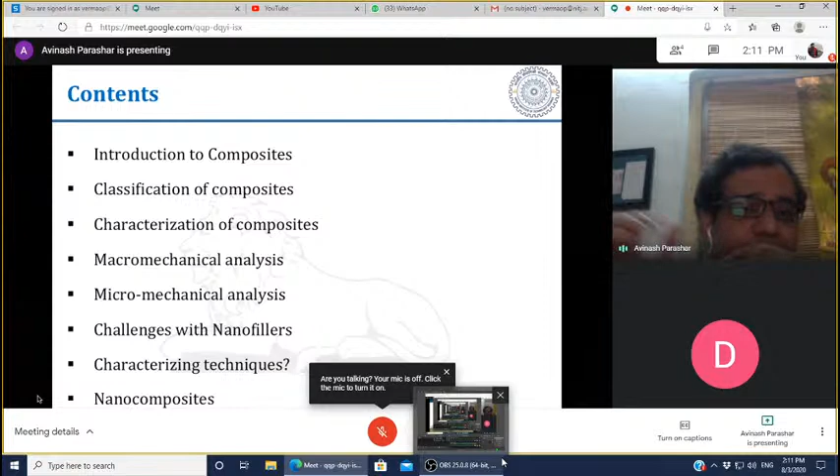So I am moving to the next slide, which discusses the contents that I am planning to discuss during this short lecture. Introduction to composites, how we can classify composites - composite can be classified in many ways. Characterization of composite - one of the main challenges we are facing with composite is how to evaluate and characterize these composite properties. Macro mechanical analysis, micro analysis.

We all discuss these words macro and micro in our day-to-day dealings when we are dealing with engineering. Like micromanagement is a very common word we use in our day-to-day life - this manager is very micro, he goes to the very micro level. It means I am talking about finer details. Macro, I am talking about broader aspects.

Then challenges with the nanofillers, nanocomposites. When we talk about nanocomposites, the word starts with nanofillers, nano reinforcement. The only difference between composites and nanocomposite is the size of the reinforcement. In one case it is conventional, in microns, whereas in nano... because this time the presentation is only one way, the communication is only one way.

So I am really sorry, because this is my first lecture on this kind of platform. Otherwise, normally I keep on interacting with the students. What is the meaning of nano? It means I am talking about at least one dimension that is in the nano regime, in nanometers. And finally, I come to nanocomposite.

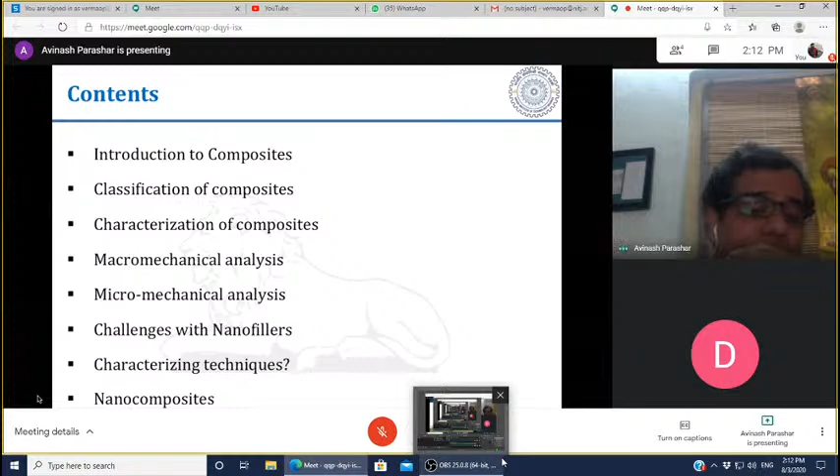We discuss how we can study nanocomposites. Most of the things that I covered in nanocomposites or nanofillers are from my own research. History of composites - we are using composites in our day-to-day life. Even if I am talking about brick made of clay reinforced with straw, again I am talking about composites. How are composites different than alloys?

The first thing that comes into why I am dealing with composites, why I am talking about composite, why not alloys. We all know what alloys are: iron alloys, ferrous alloys. Those who are in BTech or higher levels, the iron-carbon diagram is the first thing we learn in the course of material science.

If we memorize that diagram, the whole course is over. So it means I am talking about alloys, in which chemical reactions take place. Iron and carbon mix with each other and form chemical bonds. Chemical reactions take place, and the phases of iron and carbon are not separable.

We call them alloys. There are different alloys: brass, bronze, duralumin. These are some of the common alloys we talk about in day-to-day life. In all these cases, like brass, there are two metals, but they are not physically separable. Similarly, bronze is also an alloy where the phases are not separable. But when I talk about composites, again it is a mixture of two things.

One is reinforcement, the second is the matrix. Matrix is the material that covers the reinforcement. In RCC, the iron steel rods we use are the reinforcement that helps improve bending stiffness. Wood is again a composite, where cellulose is the reinforcement and lignin is the matrix.

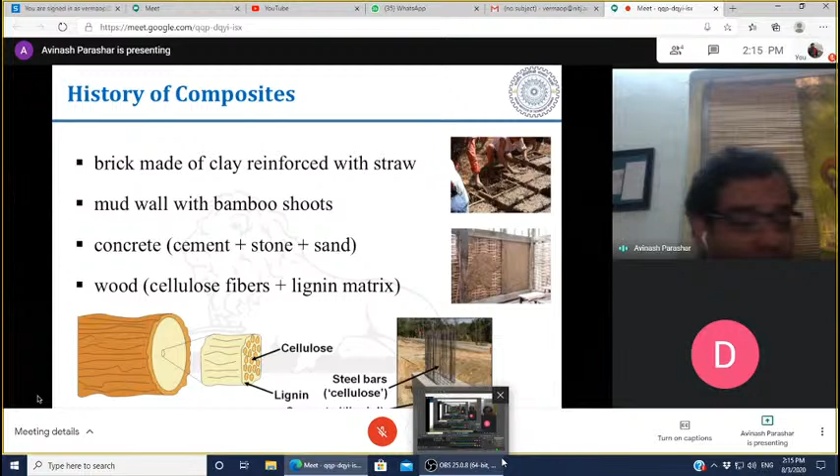Next is advanced composite materials. When the term composites was introduced in the early 90s, and still today, most applications of composite materials are in aerospace and space research, even at cryogenic temperatures going down to minus 200 degrees Celsius in space, or in regions like the North Pole or Antarctic where temperature goes down to minus 50, minus 60 degrees Celsius or even lower. So we are still looking for composite materials. Earlier, in 1990 when composites were introduced, they were referred to as advanced composite materials and used in the aerospace industry.

Some examples of composites are carbon fiber epoxy, where carbon fiber is the reinforcement and epoxy is a thermosetting polymer. Epoxy adhesives—we've used them since childhood. So epoxy here is the matrix. Glass fiber epoxy is another kind of composite where the reinforcement is changed. Alumina particles and aluminium is another class of composite, where both the matrix and reinforcement are changed.

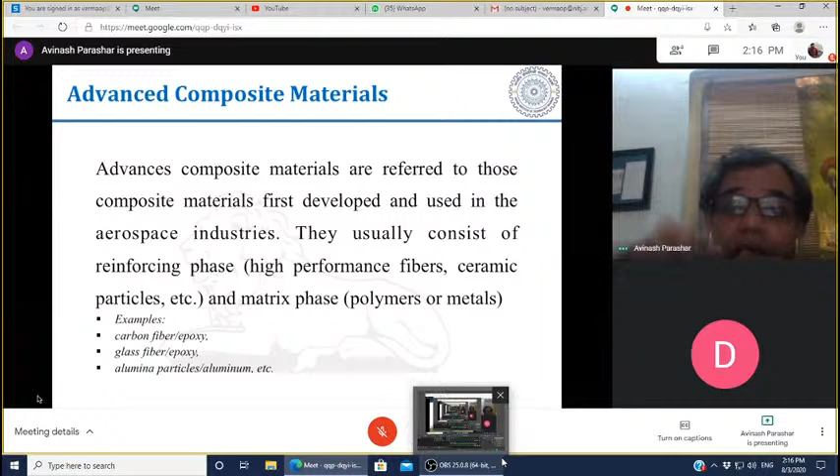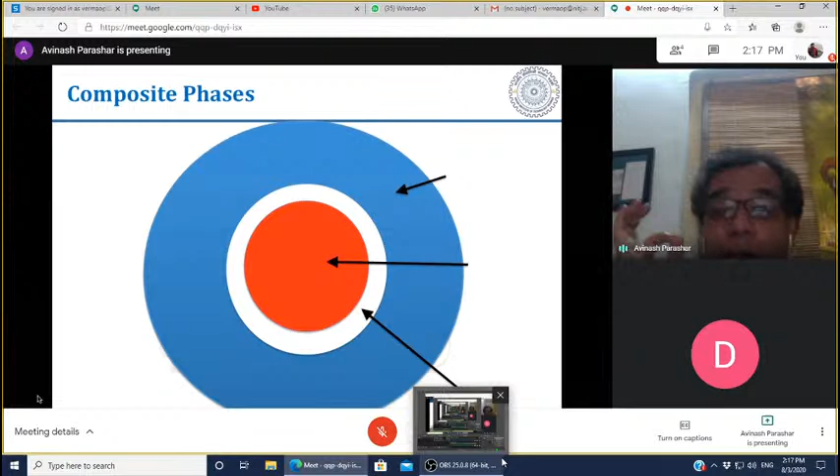Now moving to the next slide. Here in this figure you can see three colors, three circles. The outer big blue circle, then a smaller one—this is like the front face of a big pipe, I'm considering it like this. So there are three materials I am going to talk about. The red one is the most important; it basically governs the property of a composite. So what are these three phases?

First, the matrix—the material that needs to be reinforced because the matrix has weak properties, and I want to reinforce it for higher strength. So I call it matrix. Then I reinforce it using fiber, shown in red. It can be a glass fiber, a carbon fiber, or if the dimensions are in nanometers, I can call it a nanofiber. Then there is a third thing, the white region—this is going to be the interface between matrix and fiber.

Whenever we apply any load on this phase, I apply load to the matrix. Using this interface, all the load is transferred to the fiber, which has superior mechanical, thermal, or whatever properties we are talking about. So it basically governs the overall properties of the composite. Overall, this is referred to as a composite material or composite pipe. So I divide the composite into three phases: matrix, fiber, and interface. This is basically the overall view of a composite material.

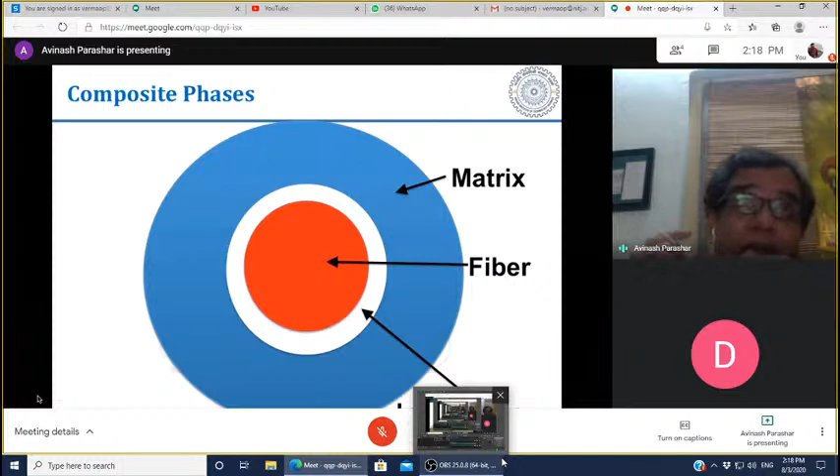So the interface plays a very important role. Even when I am dealing with nanocomposites, working in the field of nanocomposites, I still feel the interface plays a very significant role.

If I know the properties of the fiber, fiber has a very superior strength. Just think, you have a steel rod, and you put some plastic surrounding it. Now you apply some load - where will all the load go? You cannot stretch it, because that steel rod governs the mechanical properties of that overall object. The steel rod is surrounded by plastic, but it is not the plastic that governs the deformation, it is the steel rod. Even in your pen or pencil, if you start stretching it, it's not the outer wood but the inside graphite that governs the overall mechanical properties. So in that case, fiber is the one governing the properties.

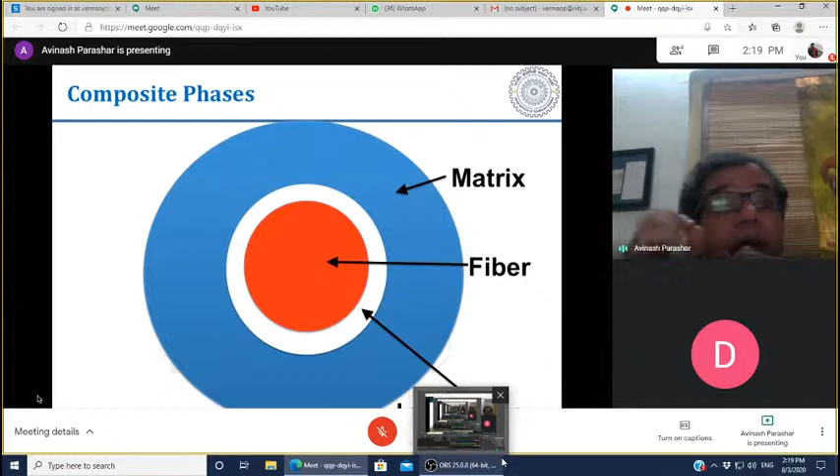Now, composite can be of different types. I can classify composite based on matrix. There are three phases in composite: matrix, fiber, and interface. I can classify composite based on all three. A composite can be a polymer matrix, where the matrix is a polymer. Metal matrix, like aluminium based alloys or copper based alloys - metals used as matrix with different types of reinforcement. Then the third is ceramics matrix, like alumina we are using. So we can classify composite based on these three categories: polymer, metal, ceramics.

Further, polymer matrix can also be classified as thermoset polymers, thermoplastic polymers, and rubber. Thermoset and thermoplastic I don't need to explain further, since we all know what they are. Thermoplastics can regain their strength and be remolded by raising the temperature above the glass transition temperature, melting it, and remolding. Whereas thermosets, it's not possible - it has a degradation temperature, and it starts degrading if we increase the temperature.

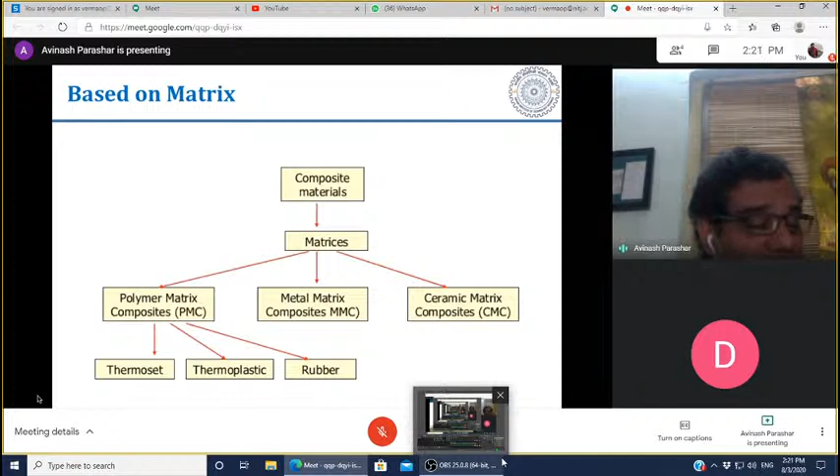Another way to classify composites is by reinforcement. I can classify composite based on two things: the type of reinforcement I'm using, and the geometry of the reinforcement used for manufacturing or synthesizing the composite. Continuous fiber - unidirectional lamina composite fiber - means fibers are of long length, going from one end to the other end of the composite. If talking about composite plates, the length of the fiber is from one edge to another edge. I call this continuous fiber.

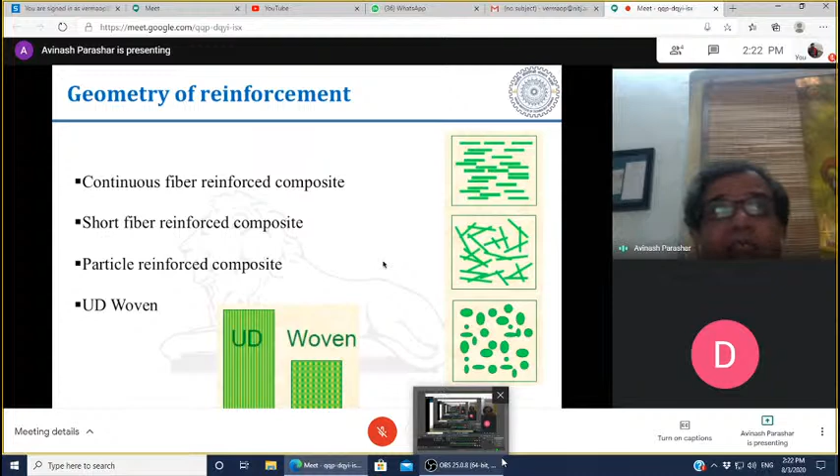Whenever we deal with composites, we normally talk in terms of specific properties - mechanical strength divided by the density of the material. When I divide by density, higher the density, lower the specific strength; lower the density, higher the specific strength. Metals normally have low specific strength because they have very high density. Polymer based composites are very light in weight, really very light in weight.

They are used in aerospace industries because every inch, every gram of weight needs to be paid for. I need a bigger engine to lift a higher weight, so I want to reduce the weight as much as possible.

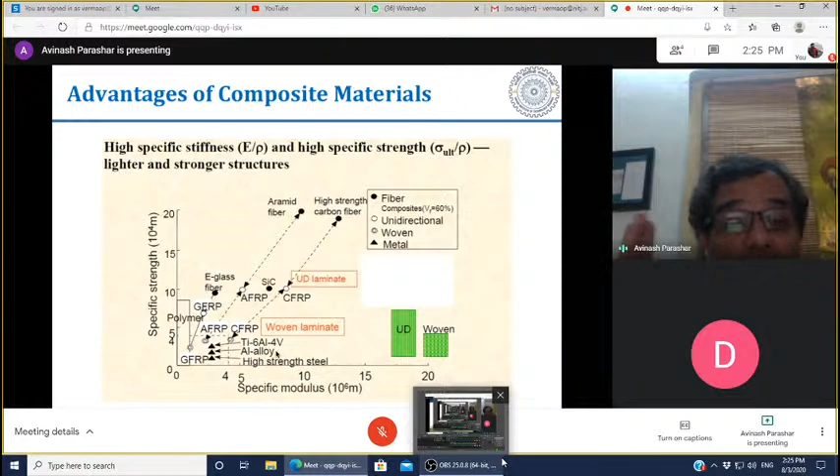So these types of composites also have different types of strength, and the strength of a composite depends on the orientation of the fiber as well. We will discuss what are going to be the advantages of the composites.

When I'm talking about polymer, it means what is the biggest problem that we have with the metals? When we have metal pipes, what is the biggest problem that we have with these materials? Metals are very heavy, metals are corrosive in nature. These days, metal pipes have very high wear, they are corrosive in nature, plus heavy in weight.

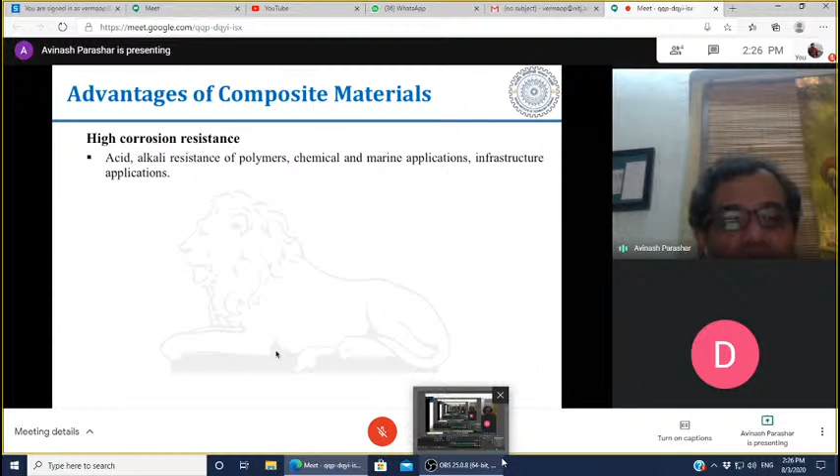Whereas if I replace these pipes - normally in Canada, if you go to the northern part of Canada, they are replacing these metallic pipes with composite pipes, and the reason is high corrosion resistance. So the maintenance cost is drastically reduced. I do not need to replace these pipes because of wear and corrosion regularly. I can take the advantage.

High impact resistance - where does this impact resistance come from? When I am talking about space structures, I need it because debris comes and damages the parts. So high impact resistance despite having a low weight. We are using this composite in automobiles as well, where weight is low.

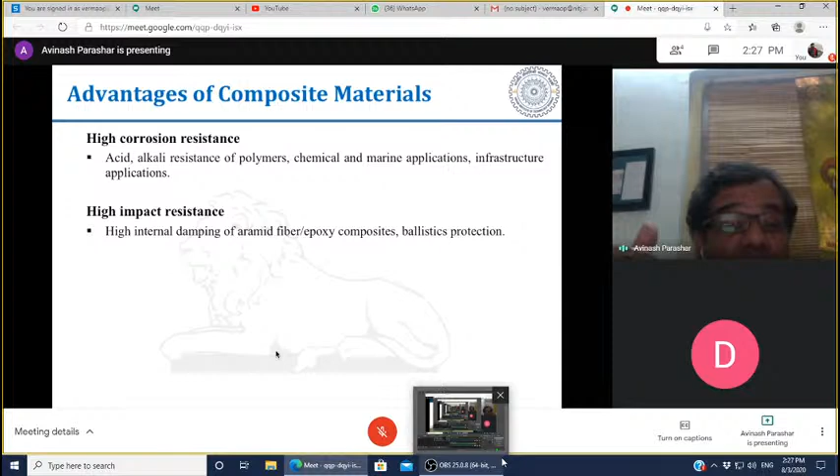Now these days, whenever we are going to purchase a car, what is the main question that we ask at the dealer end? If we are purchasing a Honda City car, what is the first question we are asking? As an Indian, I can say I just ask two questions. My first question is, what is the average, because we are more interested in mileage. Second thing is the capacity of the engine - how many cc is this engine? Now if you see, Honda cars are very light in weight, and these big cars are very light in weight and very high power, and the reason is because they are using composites as a material for manufacturing most of the components.

So high impact resistance, then we have high wear resistance - again, I talked about ceramic based reinforcements. High wear resistance, resistance to extreme mechanical environment conditions. When we are talking about extreme temperatures, suppose I want to make some space structure - what do you think the temperature is going to be over there in the daytime?

If the temperature is around 150 degrees Celsius in the daytime, what is the temperature at night? Minus 150 degrees Celsius, an overall range of 300 degrees Celsius. Every material has a thermal expansion coefficient. So what do you think, can the dimensions and tolerances for a component designed to work across such a temperature range, from minus 150 to plus 150, remain stable? No, it cannot work. The dimensions will definitely change because the material will contract at night and expand in the daytime. So I need a composite material that takes care of this, because there is no metal I know that can handle this.

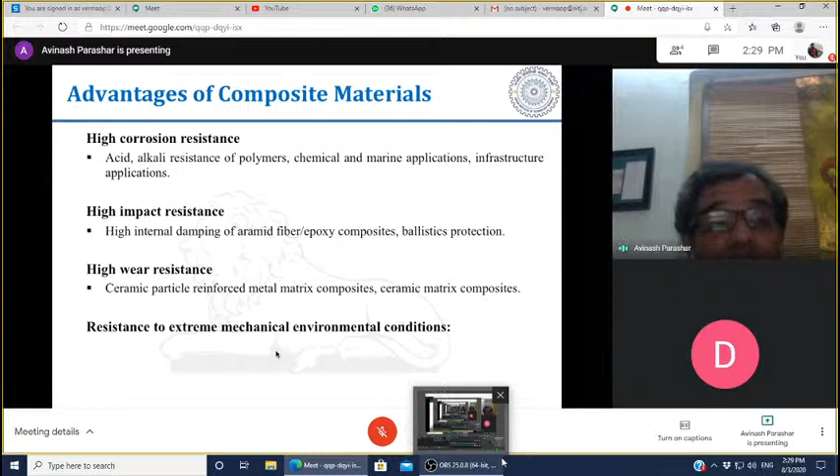So again, composite comes as a survivor. Carbon reinforced carbon matrix resists a temperature of 3300 degrees Celsius for a space shuttle. In the space shuttle we use carbon matrix, carbon fiber - everything is made up of carbon, because it can resist a temperature of 3300 degrees Celsius.

Carbon epoxy composite - read this line very carefully. Carbon epoxy composite has near zero thermal expansion. It means the overall alpha of the composite is going to be zero. So temperature has no effect on it, because epoxy has a positive thermal expansion coefficient, whereas carbon has a negative one. So when I mix these two materials and make a composite, the overall thermal expansion coefficient becomes negligible. So when I subject these structures to a range of temperatures, the material will not expand and contract.

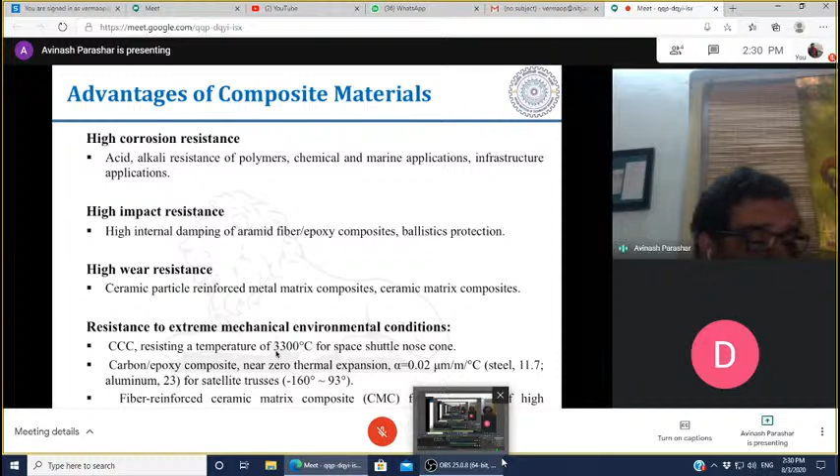This is one of the advantages we have with composites - tailorable properties. One of the major advantages of composites is the word tailorable. What is the meaning of tailorable? Tailorable means I can play with the properties of the material.

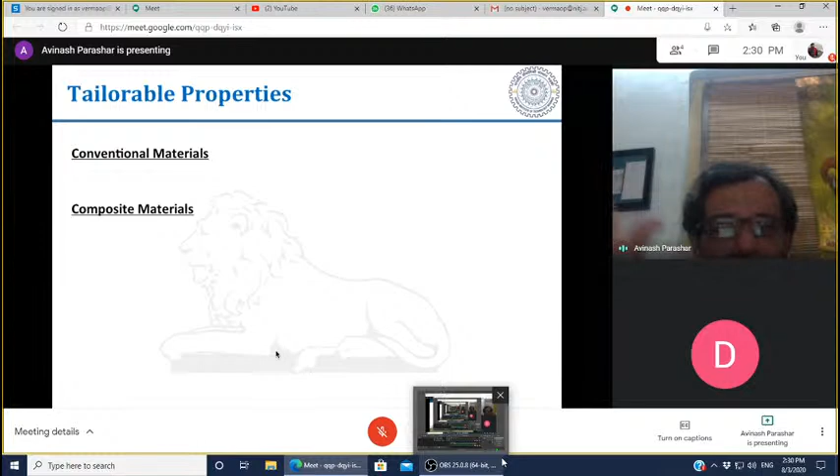What about conventional materials - can I not do this? Yes, I cannot. With conventional materials, most of you are working on Abaqus, ANSYS - what exactly are you doing? You have a geometry, you apply some load, and then you calculate the stresses - beautiful blue, green color stress distribution - and you identify, oh this color is red. The different colors give me an idea that my results are perfectly fine.

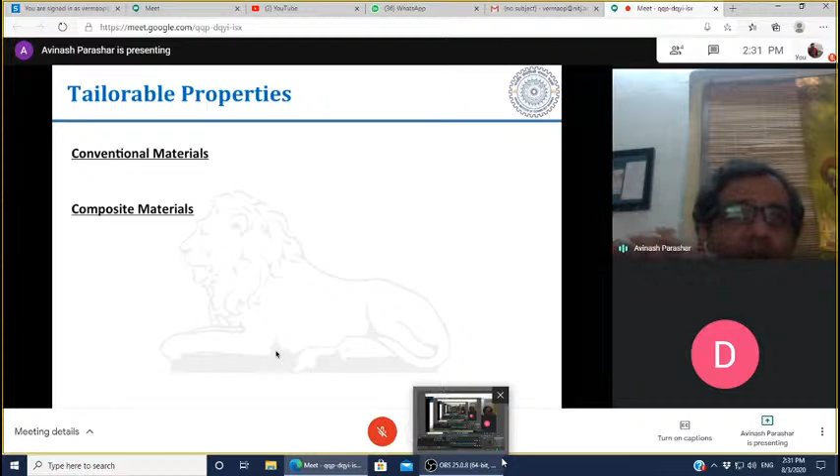Now I have differently colored images, but what exactly can I do if I identify some regions having very high stress? I will immediately optimize the geometry, because I know I cannot change the properties of the steel that I'm using as a material. Can you play and change the steel properties? No, you cannot do this. So I can say that I select a material and design for shape and size - this is conventional materials, meaning metals and alloys.

Composite materials - here I can change and play with the material properties as well. So I have two design parameters: one is shape and size, as we already have, and the other is material - I can also play with the mechanical properties. If I vary the property of the reinforcement, I can change the properties of the composite. This is one of the basic thumb rules in composites - I can manage and tailor the mechanical and thermal properties according to my need and desire.

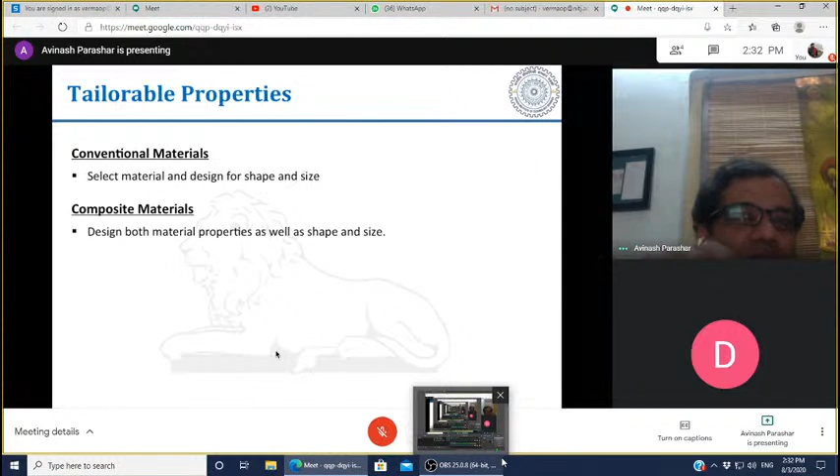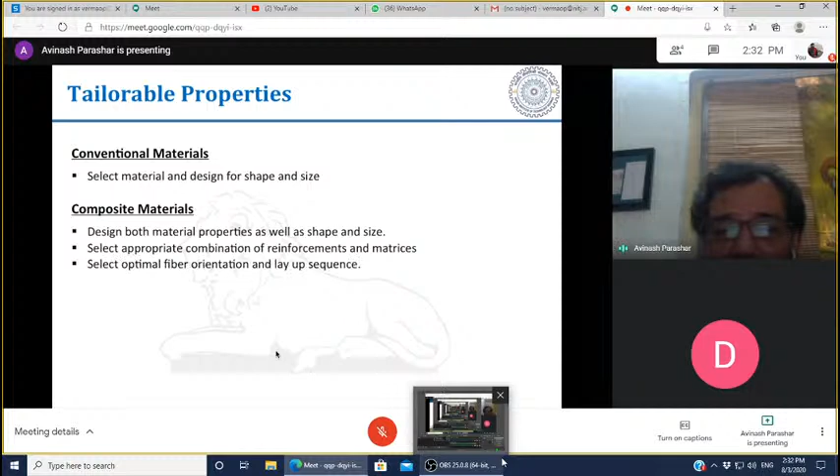That's why we can use composite materials at very high temperatures as well as cryogenic temperatures, because I have this tailorability in my hand. Even at cryogenic temperature, I know which fiber and which matrix to use, and exactly which properties I am looking for. So I select the appropriate combination of reinforcement and matrix, select the optimal fiber orientation and layup sequence, and finally I can design for both.

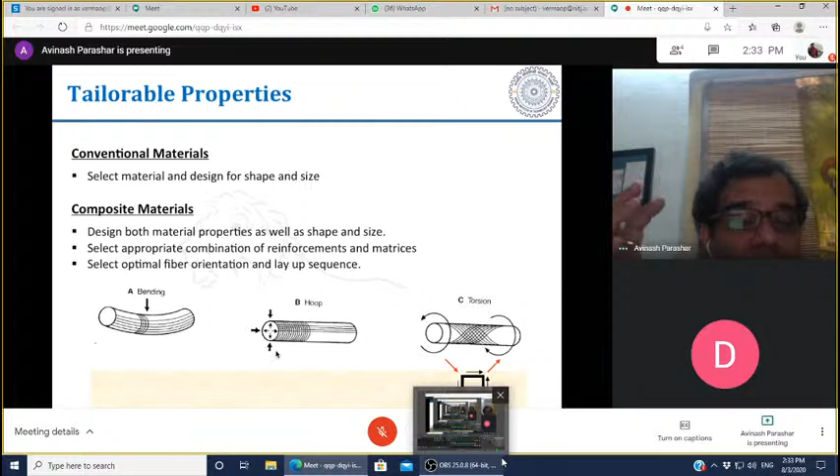If you see over here, fibers are wrapped around. In the first case, when it's wrapped around, it will take bending and hoop loads. But when I subject it to torsion, the fiber orientation on the pipe is changed, so that it can account for torsion as well. This is the way I can manage the tailorability of the material properties - I can tailor it for both.

What are the challenges when I am talking about composites?

Quickly, I am talking about composites. I talked about many advantages: high impact, low weight, extreme environmental conditions. The biggest advantage is that the properties are tailorable. Now I am talking about challenges. What is the reason that the application of composites and nanocomposites is still limited to aerospace or very specific applications?

I don't know how many of you play lawn tennis. If you do, just go to the market and purchase a racket. Earlier, if you remember Wimbledon in the 1980s and 1990s, rackets were made of wood, then some metal component like aluminium reinforced. Now go to the market and ask the cost. A wooden racket will cost around 500 to 1000 rupees. One with a superior metal light alloy will cost you 10,000 rupees. Then the shopkeeper will say, sir, this is a carbon fiber reinforced composite racket, it will cost 10 to 50,000 rupees. It has superior strength and is very lightweight.

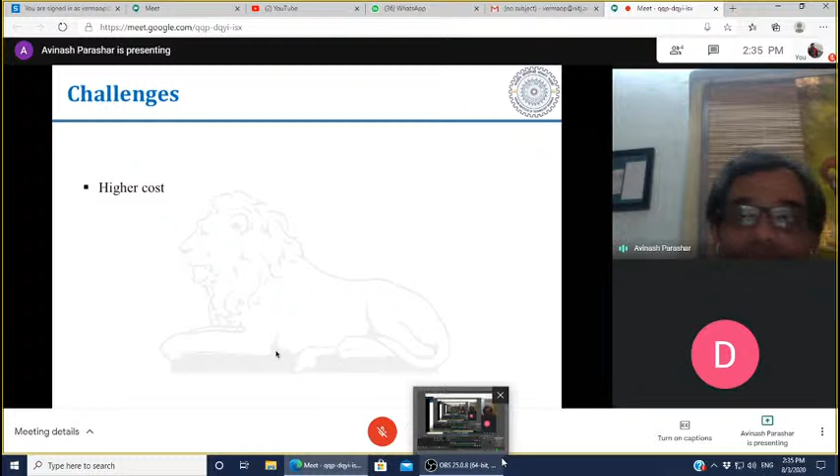Now I am talking a lot about composites. Are there only positive things, or are there some negative things? Yes, there are certain negative things. The first thing, take the example of the lawn tennis racket: light in weight, superior strength, but the cost is 50,000 rupees, very high. I cannot purchase it. So cost is one of the big issues when dealing with composite material, specifically the fiber. What type of fiber are we using? Carbon fiber is very expensive, that's why we use it for manufacturing the nose of the space shuttle. Very superior properties, but the cost is very high.

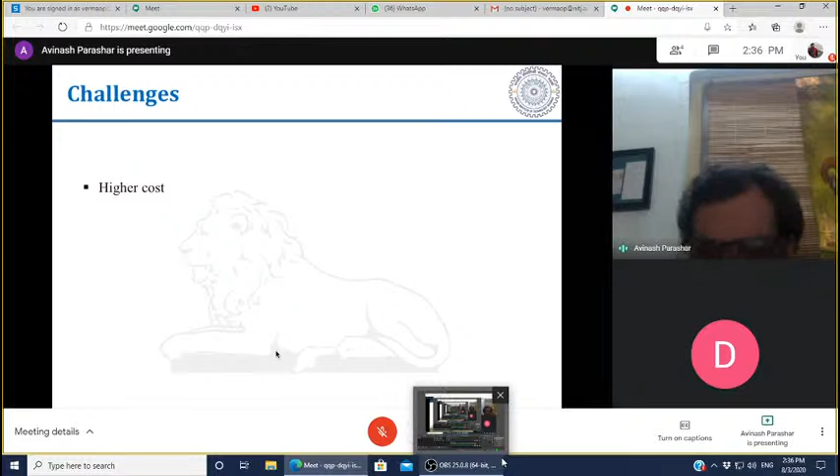Other thing is, metals are normally isotropic in nature. I hope you understand the words isotropic, orthotropic, and transversely isotropic. Metal is isotropic in nature, I only need E, Young's modulus, and Poisson's ratio to characterize whatever I want, just these two parameters. But when dealing with composites, it's not isotropic in nature normally. It's either transversely isotropic, sometimes orthotropic, and in very few cases it is also isotropic as well. So characterization of these composites is still a very challenging task, that's why composites remain an area of focused research.

Weak in the transverse direction, I am talking about fiber. Along the length of the fiber, say a long fiber with a diameter of 1 micron and length of around 10 centimeters. If you have a surgical thread at home, stretch it in tension, there is some strength. But compress it, there is no strength against compression. Along the thickness, if I apply tensile loading, the threads will start damaging, it does not have much strength there. Similar is the case in composites: along the length, superior strength, but in the transverse direction, the strength gets reduced.

Other thing is difficulty in joining and repairing. I was working in NTPC, I still remember turbine blades. Annually we check the turbine blades for wear, tear, and any crack formation. We have magnetic material, magnetic powder. We have many techniques, magnetic powder can be used for subsurface damage and defects, ultrasonic testing, and many other things that can be used with metals.

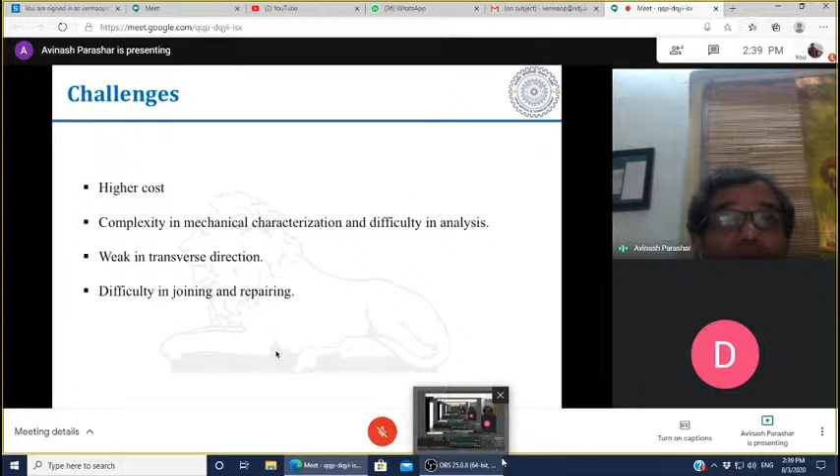So this area is still an area of research, and my PhD in Canada was based on adhesive joining of composite pipes. Despite having so much flow and everything, we are developing different types of adhesives that can be used for the joining of the pipes. It means instead of joining by mechanical means, we are looking at adhesives.

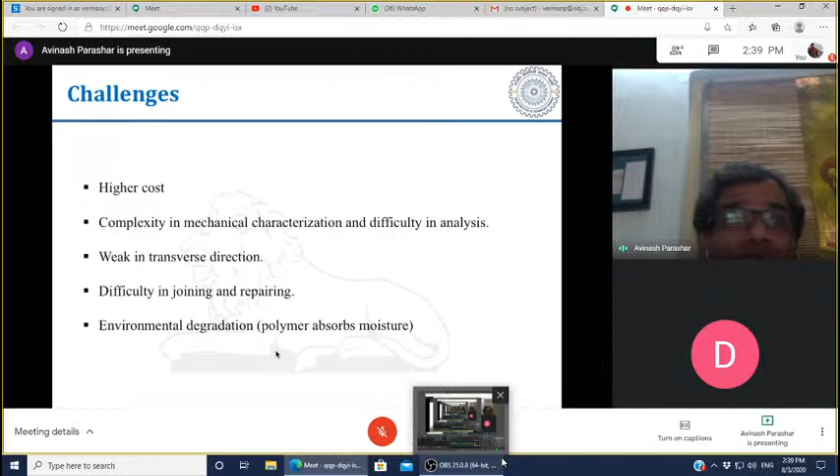Environmental degradation is another limitation we have - sometimes these polymers start absorbing moisture.

Dreamliner - in India we have the Dreamliner, Airbus 380. Have you seen these big flying machines? What is the advantage we have with these? The number of passengers they can carry is really huge. Airbus 380, around 800 passengers can board and deboard at once. The engines are the same, slightly higher. But how is it possible that we are making these kinds of huge planes without much change in the engines?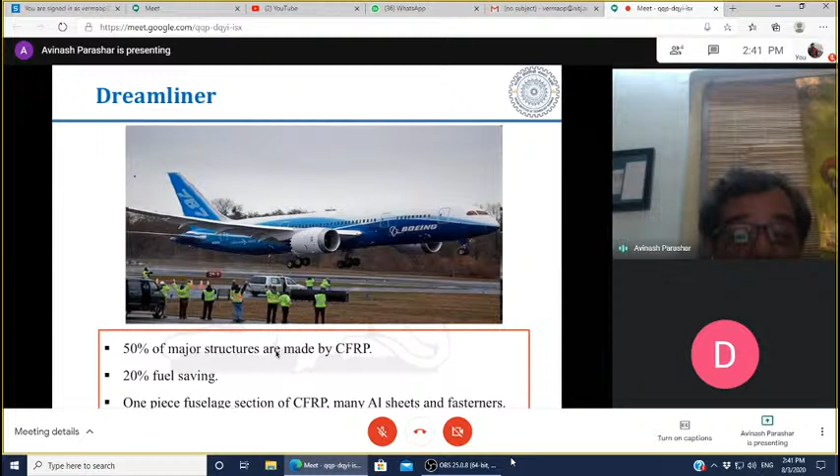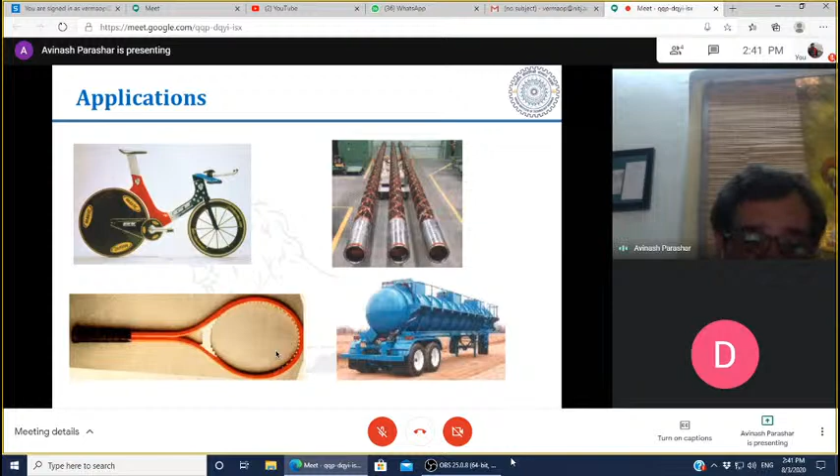Despite having superior strength, it is very low in weight. These are some examples, and some more examples when we are talking about composites. A racket is one good example. Nowadays these shafts, pipes, cycles, pressure vessels - we are using composites for all of these.

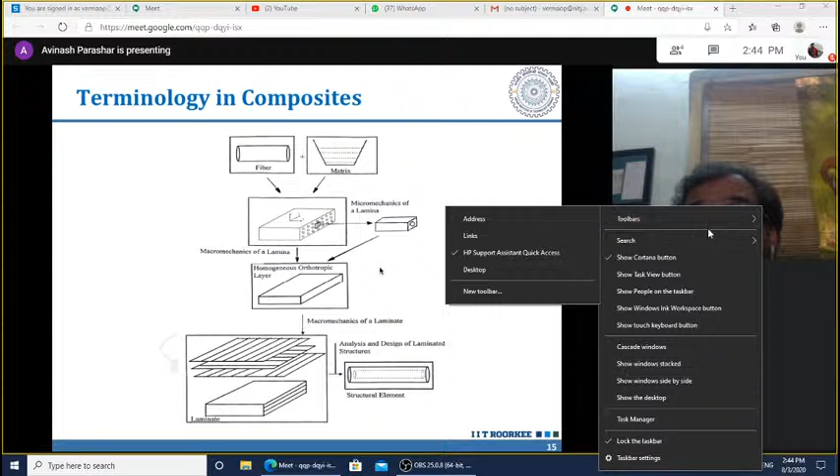You can see over here, a homogeneous orthotropic layer. In this case, this plate, you cannot see any fiber because I homogenized it. I have a single Young's modulus that represents the overall composite, including fiber as well as matrix. This type of analysis is known as macro mechanics of a lamina, or macro analysis of a lamina.

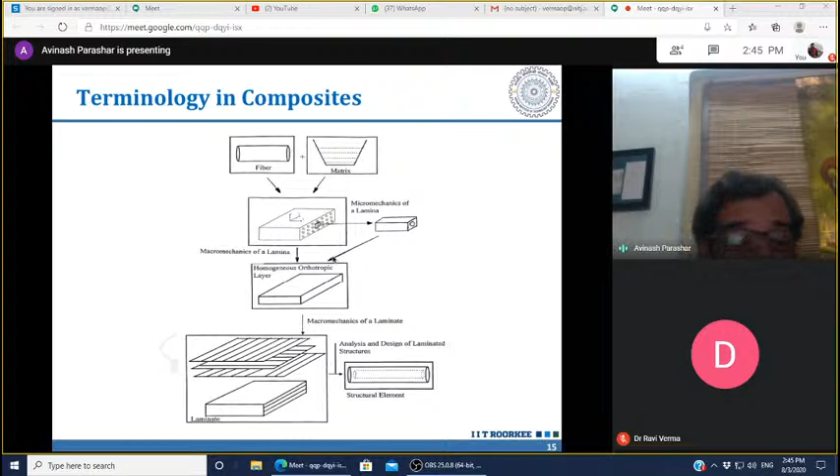But if I still look at separate fiber, separate matrix, I am analyzing it at a separate level. I call it micro mechanics of a lamina. It means I am dealing separately with fiber and with matrix, a detailed analysis, and I call this micromechanics of a lamina. Characterization techniques.

Isotropic and orthotropic. Micromechanics of a composite lamina. Homogenization - what is homogenization? I talked about this term homogenization in my previous slide. Before I go to the next slide.

Professor Verma, are you listening to me? Hello? Is there anyone who is listening to me? Oh, so you are with me, because I was speaking. Okay, okay, okay. So okay, then fine.

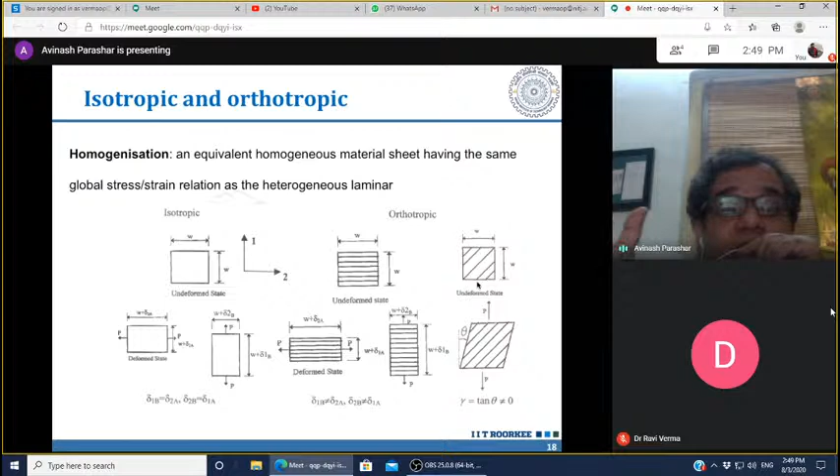What is this case? This is the case when the fiber is oriented at an angle. So my dear friends, if we decide what is going to be this angle theta, I can easily tailor the properties of this composite, along the unidirectional as well as along the transverse direction. That's why I use the term tailored.

Quickly, we all learned this from our BTech first year, the stress-strain relationship using Hooke's law. What exactly did I do here? If you see this matrix, the strain and stress relationship - what is this? It is representing my stress tensor with my strain tensor. And what is C? Here C is representing my stiffness matrix. And what is S? S is representing my compliance matrix. And here you can see the properties.

We all handle these properties. Epsilon X is the strain in X direction. Sigma X is the stress in my X direction. 1 over E times this. You can easily solve this matrix - this multiplication of tensors. So I can easily calculate what is going to be the strain in the direction of X. This is isotropic material behavior.

And these are my stiffness matrix. Very commonly, you can see over here how many material parameters I am using in this matrix. Top right, E and nu, only two. This is isotropic. What about G? My G is dependent on E and nu. If I know E and nu, I can easily calculate G. G is equal to E divided by 2 times 1 plus nu.

We all remember that mathematical expression. I can easily calculate it out. This is the expanded form. I just take the inverse of this matrix and I will get something like this. I can calculate what are the stresses if the strains are known. In this case, I can calculate what are the strains if the stress values are known.

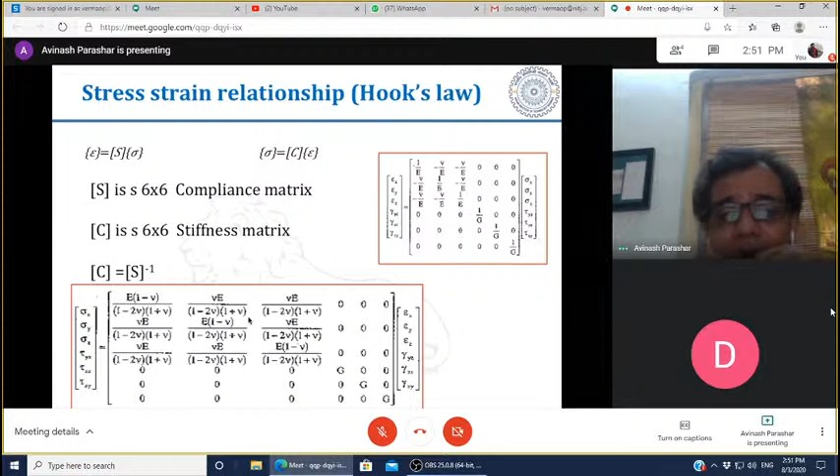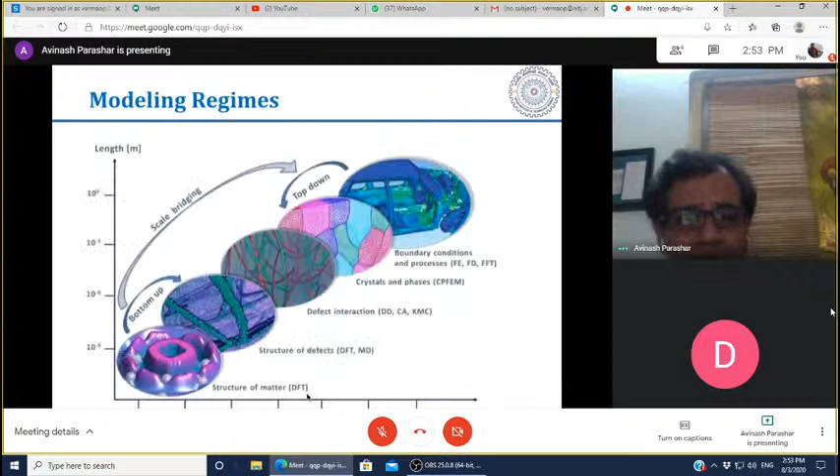It's having an E, a nu, a G. Okay, what about when I start applying the load in the direction that is perpendicular to the fiber direction? If I take the fiber direction as X, if my fiber length is aligned with the X direction, what will happen if I apply a load in the Y direction?

It will have properties in Y. What will happen if I apply a load in the Z direction? The Y and Z directions will have the same properties because this fiber, if you see, is perfectly circular. It is aligned along the length. So perpendicular to this, in these directions, the properties will remain isotropic.

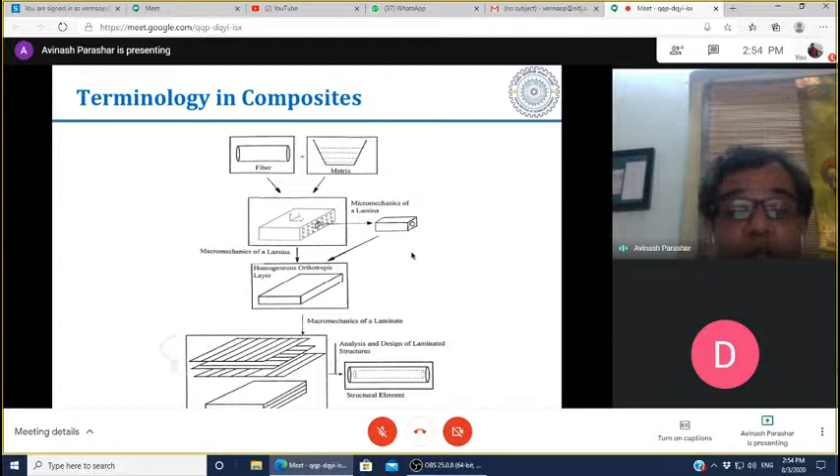We call it transversely isotropic. Where is this transverse? If my fiber is aligned with the X direction, then in the Y and Z directions, my material properties will remain the same. That is the direction perpendicular to the orientation of the fiber, and I call it transverse to the fiber. That's why we have this transversely isotropic matrix.

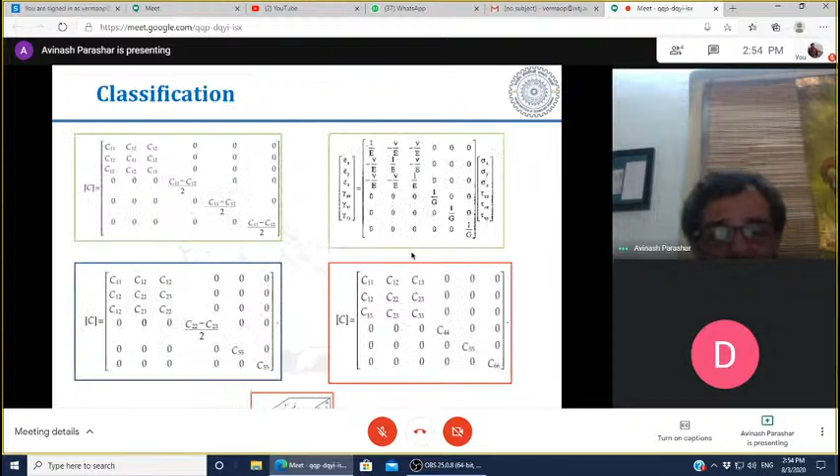Now, what about designing a lamina? When I'm talking about designing a lamina, you see in my previous slide the width of the fiber is very low, I'm talking in microns. In the previous slide, if you see a lamina, what is the thickness compared to the length and width? I will say the thickness is negligible, it's very low, I cannot compare it.

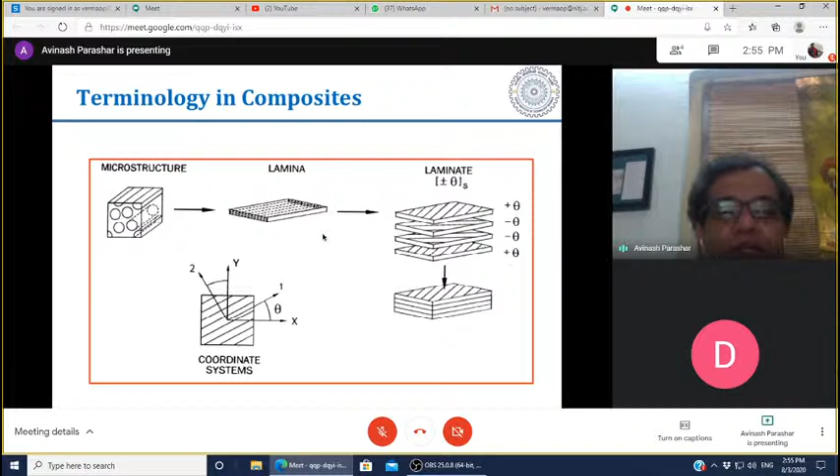So straight away, when I am applying stress, when I want to calculate stress and strain, the first thing I do is assume plane stress assumptions. I will assume plane stress assumptions that will help simplify my case.

Perfectly fine. Now, macro mechanical analysis. If you see over here, when I want to calculate stress and strain, I just need S11. If I want to calculate the shear component, I need S66. Perfectly fine, this makes my life much simpler.

What about when the fiber is at an orientation? What happens to the stress and strain relationship? Because whatever I am talking about here is the case when the fiber is in one direction, X direction. But when my fiber orientation is in between the X and Y direction, what will happen to this S matrix and Q matrix?

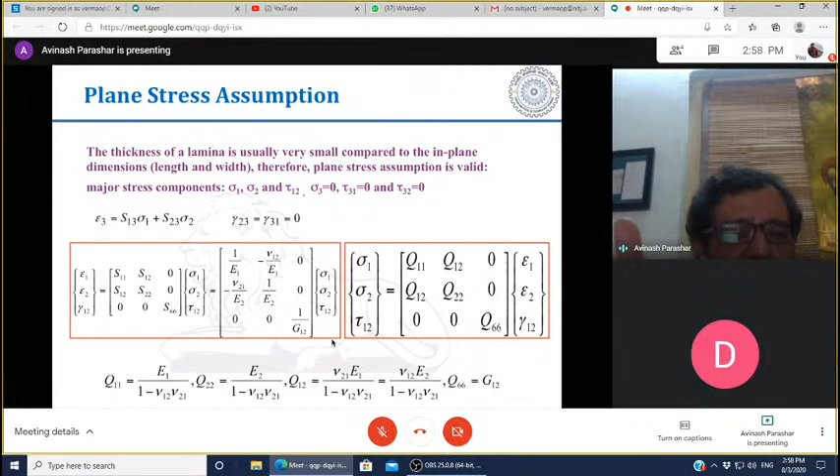What is this S bar, Q bar? What is S11? I know what is my S11. S11 is 1 over E1. This is the case when my fiber is perfectly oriented with the X direction. I get these properties from experiments, and I also have these properties in books. Unidirectional properties are in books because we already calculated them using experimental means.

S bar and Q bar are functions of angle theta. S11, I know what is my S11. S11 is 1 over E1. What is my S12? I know what is my S12. S12 is minus nu12 by E1.

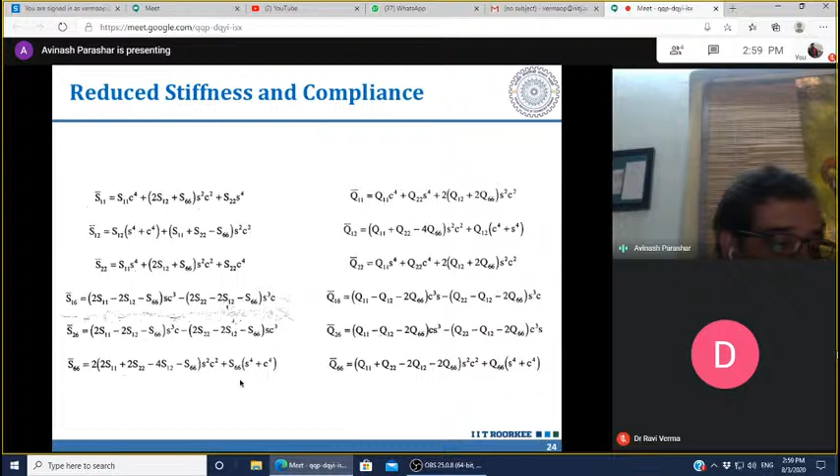So in this manner, I can calculate it for angled lamina. This is basically macro mechanics. Macro means when I am calculating this, I can straight away go and calculate what is going to be the stress of the composite, the stress of the lamina. Here I am not talking about stress in fiber or stress in matrix.

Have I discussed anything about stress in fiber? I am talking about global stresses, local stresses. Only coordinates are changing, but I am only talking about direction, not about fiber and matrix separately. I am talking about lamina. I am not looking at fiber, it is just like the moon.

I am looking at the moon from here. It looks like a perfect sphere. But if I go closer and closer, it's not a sphere. I will start seeing there are hills, craters, and these things. When I start analyzing this, oh, you are doing a micro analysis of the moon surface. Micro means I am going in more detail.

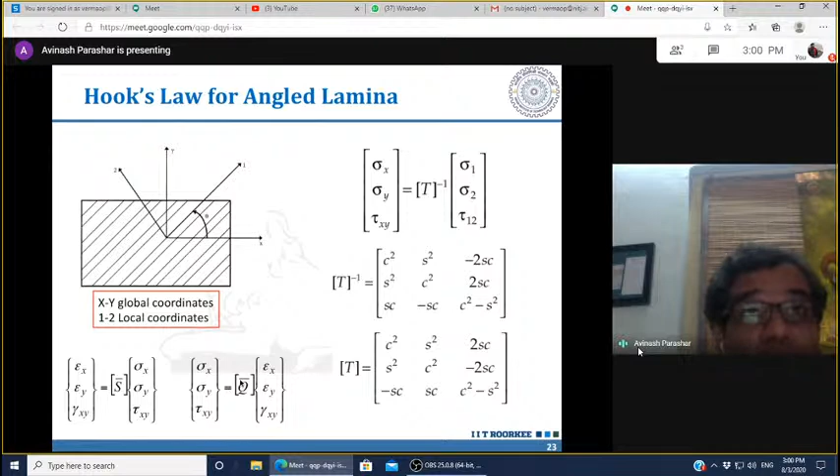One most direct way to determine the material parameters is through experiments. However, experimental evaluations are usually quite expensive and time consuming, especially when dealing with nano composites. It's really difficult to experimentally characterize nano composites. So we are still making different models that can give us an idea whether this composite, or nano composite, will work or not.

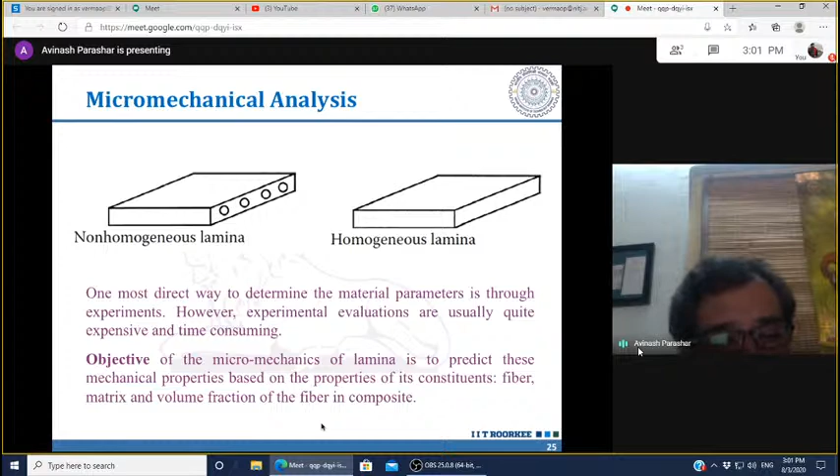The objective of micromechanics of a lamina is to predict these mechanical properties based on the properties of its constituents: fiber, matrix, and volume fraction. Now come the assumptions. As we go in detail, finer details, and try to make models, why are we looking at micromechanical analysis? Because experiments sometimes will not give us the exact physics. So we are developing analytical models, numerical models, atomistic models, quantum mechanics based models to get more detailed analysis, and we call it micromechanical analysis.

When we start doing this, we are making mathematical models. Mathematical models are complex in nature. In order to simplify it, we come up with assumptions. What is the first assumption we have? The fibers are uniformly distributed in the matrix according to a certain pattern, and all fibers have the same radius.

It means I am going to do micromechanical analysis, but I am assuming something before starting. I am assuming that all my fibers are of the same length, same diameter, arranged in a perfect manner, as you can see, in a hexagonal or square pattern. This is how I can study these, because I cannot go and study each and every fiber. I am assuming this. This is the first assumption when dealing with micro analysis.

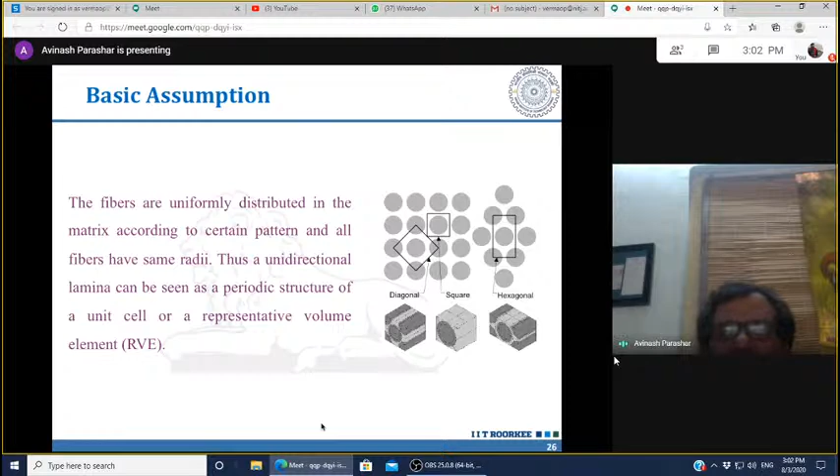So when talking about composites, I start with macro analysis. First, I look at a broader spectrum. Okay, I have a lamina, the Young's modulus is this much, the Poisson's ratio is this much. I don't care about fiber details, that's the thing that's helpful. Now I'm going...